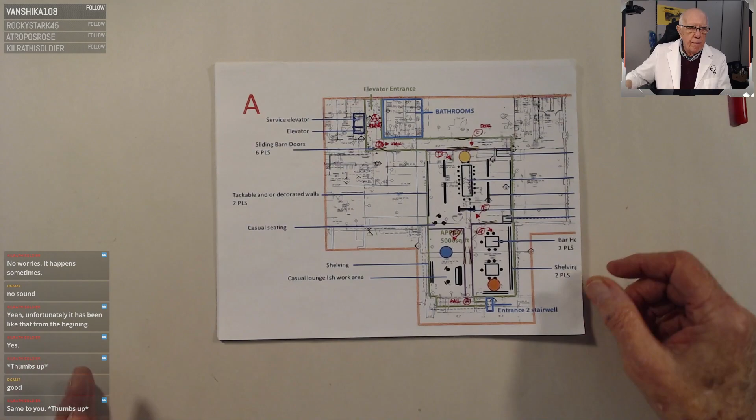Let's go through this, and I think a very interesting thing took place prior to the holidays. I was notified by an organization that they wanted some assistance doing an innovation center, and they had some conceptual work to take care of, so I obviously consented and said, yeah, we'd love to help you. They sent this along to begin with, so I'll walk you through the process step by step, how we took this thing from beginning to end, and what the results are thus far.

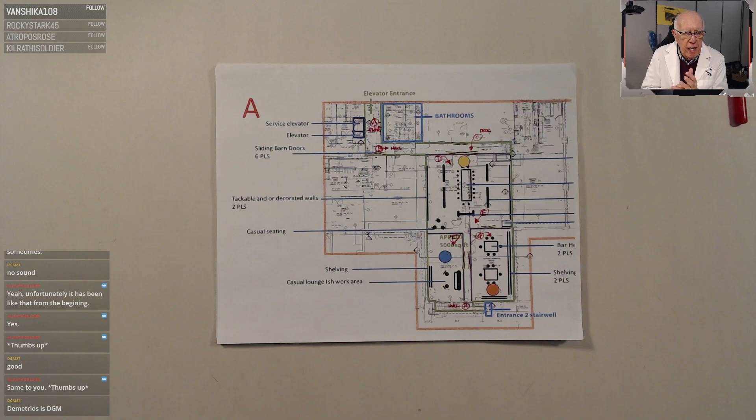So they sent this footprint along, and they've resolved - this building is interesting. It's up in this very local area here, but it's a very large space, and everything you see, for example in green, this area here and all this area here, was all part of the process that they wanted to retool. When I took a tour up there, it was really amazing because the thing is massive. You've got about 20-foot ceilings, very dark and very little light.

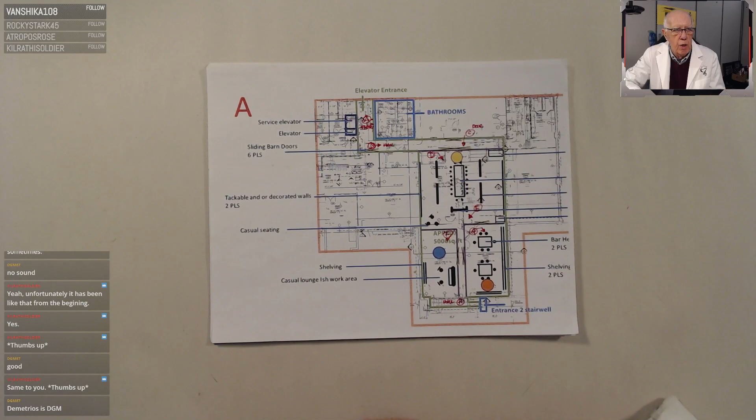Not very conducive to being an innovation center. The reason for this purpose, changing this basement area into an innovation center, was that they do a lot of development work and conceptual 3D modeling and thinking processing. So they needed a space to go down and experiment with some of the product work that we're going to be dealing with for the international market. Very large corporation, does about $120 billion a year in profits worldwide. So a very unique organization indeed.

So all that to say that I sat down with them and went through the process, toured the facility and the room that we're going to work with, and man, it was massive indeed, huge.

So you come off the elevators, and there's a facing wall here that needs to be dealt with as a graphic piece down this hallway. They want to insert some barn-type or country-type doors and some graphics on the wall, then back to double doors, barn type doors here, into this first area called their innovation center.

That's where they have a large table, some tables, some movable boards, and storage areas. That was one space. Then you move down the hallway here.

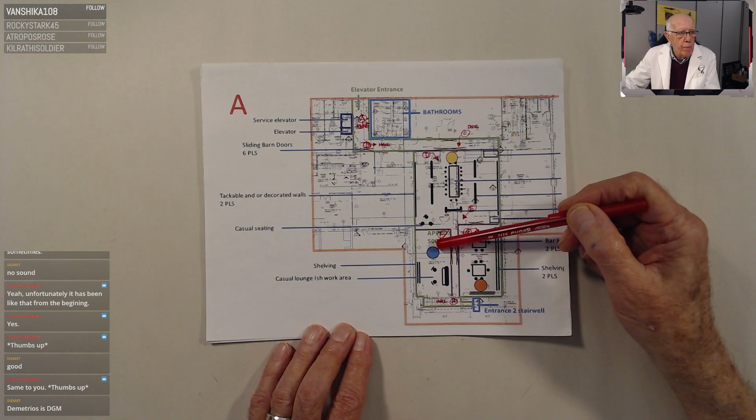On this side was a consumer or client lounge where they've had guests from around the globe, who could sit there and regroup and have meetings. Across the hall from that was another space called the preparatory or prototype lab, where they'd actually build those pieces and test them.

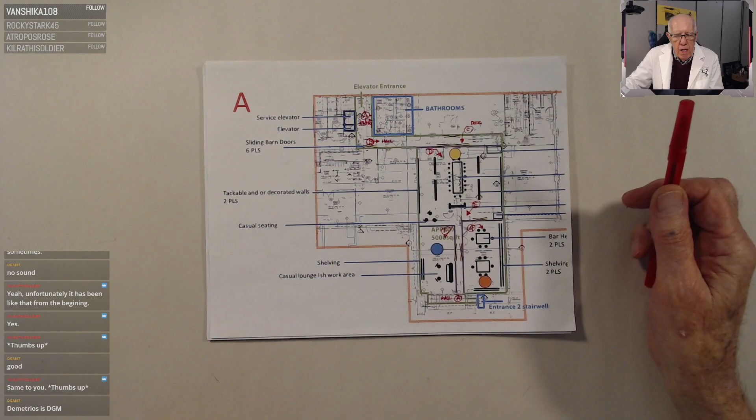So that's basically the overview of what this whole process was all about. The interesting thing, my comment was, there was a bit of an offset from the front portion of the innovation center, from the lounge and the prototype center.

I thought it'd be interesting to bring all that forward and put some nice beveled doors or entryway pieces in there, so you can see what that space is going to look like when you come into the innovation area.

This is all glass, some glass area here. These purple areas would be all glass as well.

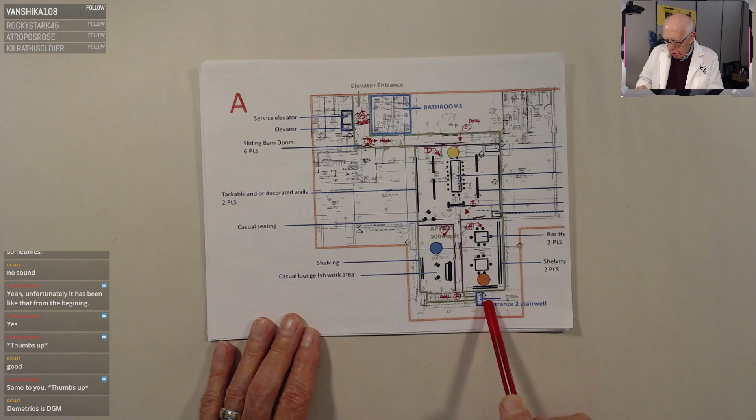Last but not least, the main entrance to the facility would be down here in the back of the building, with a big hallway and some stairwell pieces they want addressed as well. So let me walk you through how we started here and what unfolded step by step.

I'll keep that handy so we can go back and refer to it.

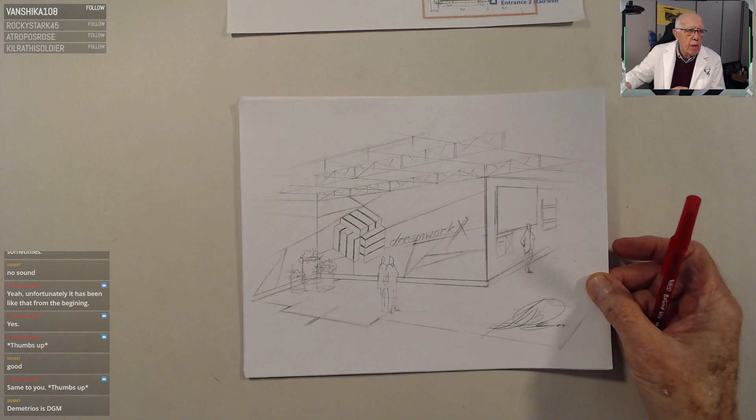The first sketch I did—before that I always like to do some little thumbnail studies, about 3x5 card size, to get the perspective and view right, keeping it very simple, knowing from the very beginning that this client's system, working with them, wasn't quite certain with the loose, very gestural sketches I like to use for conceptual development work.

So I had to be very careful about how to develop these first pass sketches, so they could see very clearly what the idea was about and what we were trying to convey to them.

So I went from very loose little sketches, for my own purposes, looking at how to break the shape down, then took those sketches and developed a second pass of thumbnail studies so they could review it. So this is what you'll see here.

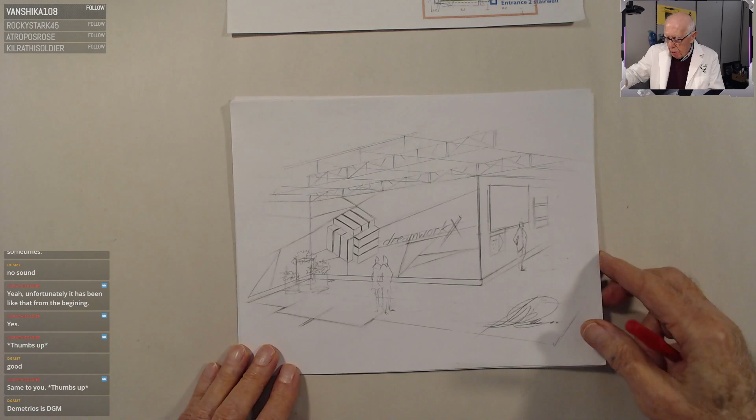This is sketch one, coming off the elevator, which is here, and looking at the facing wall and the structural elements above, up in the ceiling area. That's what this first one is all about—that was the entry piece coming in.

The second one going down the hallway, when you turn around the corner—let's go back to this one. When you turn the corner here, the big long hallway comes through, and we put this in here, and they go back and forth.

Down the hallway, they wanted to add these very exotic barrel lighting pieces—again, the barn door theme—and they specialize in certain metal materials, like storage drums for products worldwide, both cardboard and metal, just a variety of things. They've got about 400 items on their product development list, for what they're doing and involved in.

Very high ceilings, about 8, 16, maybe 20-foot ceilings—just an amazingly huge area. Again: barn door, a little wall space, glass area, barn door, glass area, and again a hallway down the way. Just to give some perspective to the shape itself. That's the view—that was the selected one, like that again.

Now into the innovation area—let's go back to this. This is the innovation center here, with two very large tables. Everybody comes around to construct the piece and do some building work.

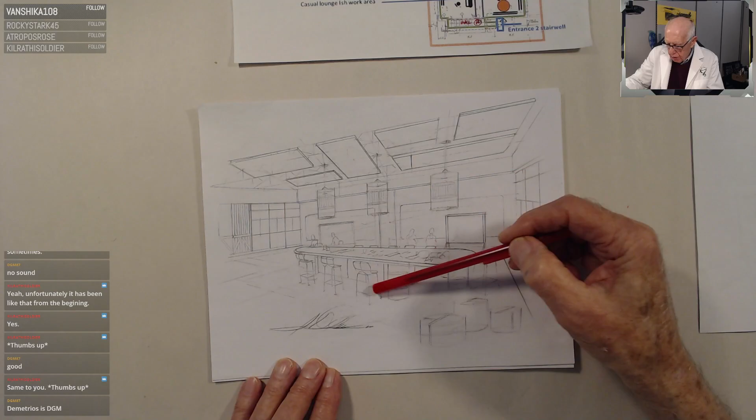Some pin boards back here, and some movable boards here, and stools, and chairs and the like, and just odds and ends in the building. This would be the glass area and a little portion of the doorway here, so they could see what was going on in the space itself.

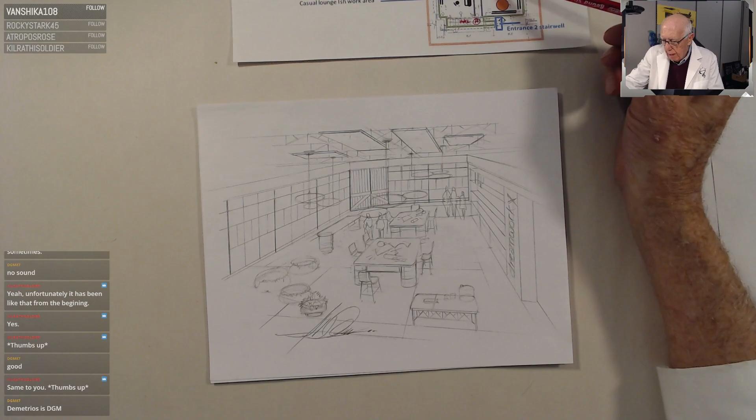So it was a third study we did for the Innovation Center, and they approved the view, looked pretty good. So we went into the next step, which is getting into what I refer to as a prototype lab, right in through here. This is the prototype area, where they'd come from the innovation spot, develop something, bring it into this area, and begin to develop a tighter process for the system they're dealing with. Again, same thing, a lot of glass, the barn door, and back to glass again.

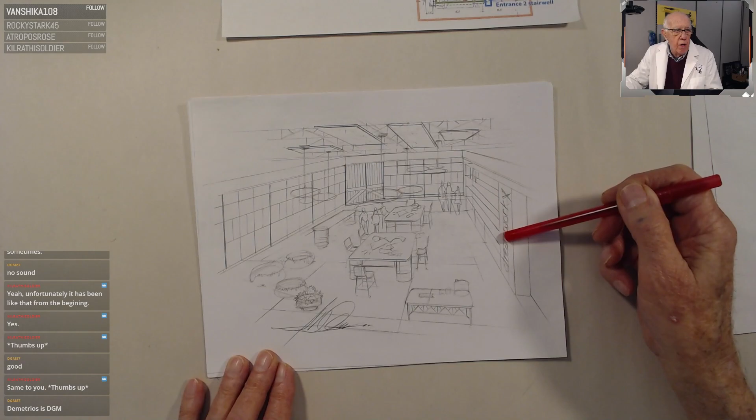A lot of storage shelving on the other side, on the opposite wall. Coffee center, some features table, some elements of just comfort in there. And then the two tables to work with to kind of resolve what this product was going to look like as we went down the line here.

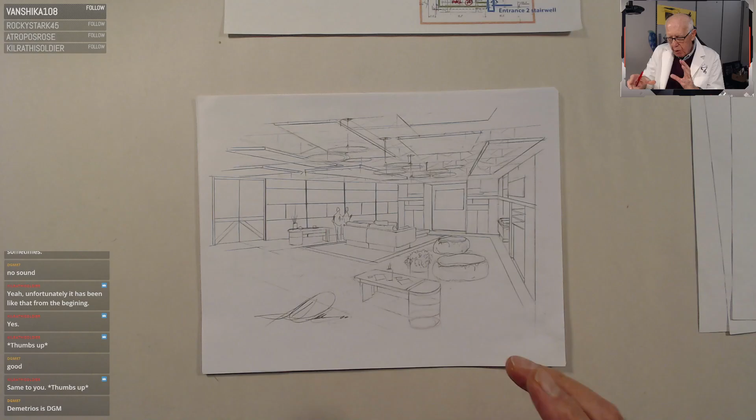So that was approved. The next one was coming back into this lounge area. Same system, for example. This is where we are here with that lounge area, and sure enough, again, barn door, glass into a back wall, television center, coffee center, storage area here, sofa, tables, and some accoutrements in the space to comfort the way through the whole process. So that is another view that I thought was pretty well merited for the actual sketch itself. So we put that together, and that was for the lounge.

Then the unique one was, let's go back to this one. They had these offsets here, if you notice, this was offset here, and this was offset here. So my suggestion was to move this wall in a bit, come back and severely bevel that back so you can see there's an actual break in that wall itself, so you can come down the hallway and see what that looks like. So those two bevels, those two 45s, would actually be barn doors for entry and egress areas here.

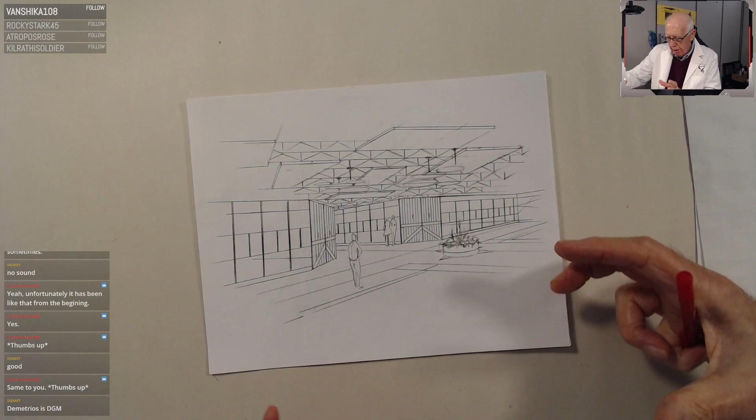So here we are. That was the actual footprint, and this is what the view looks like. You're coming down the hallway here. The Innovation Center's back here. Down the hallway, a lot of glass, barn door, glass to barn door. And again, notice that 45-degree angle so you can see what that element's going to look like when you come into the hallway. They bought that view. That was a good aspect to change, that bevel change in there. They thought that was a good move.

And the last sketch we did was the entryway off the back of the building, which again, just qualified. Stair steps, a single barn door, a graphic on the wall, and then just some elements around that. So those are the first loose studies.

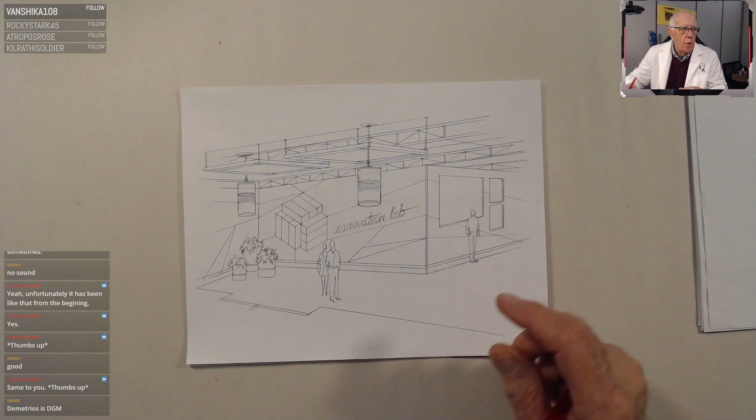From the loose studies, I tightened them down a little bit, went to this family of sketches. Once I got those all set up, I went right back in and retuned them and tightened them down. Went back to sketch 1. There was the first sketch again. There's the elevator piece coming off the elevator, looking at those pieces there. So that was part of the whole process, looking pretty good.

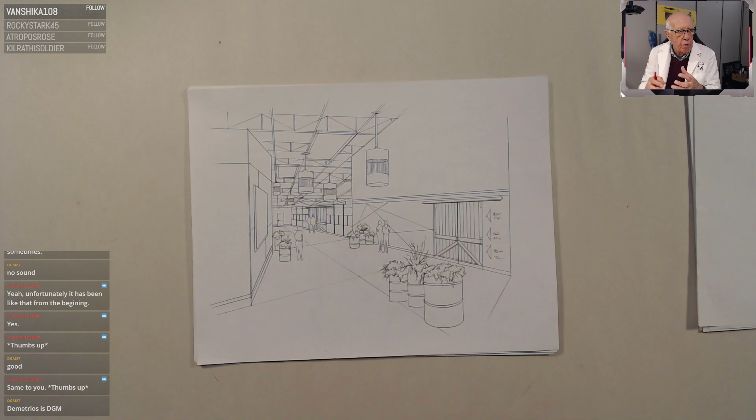Tightened that down a little bit, and let's go back through again, right down the line. Second, tightened down a little bit more, where you can actually see some of the graphics on the wall, some of the detailing work, for example, on the doors and the glass, getting a little more specific and tightening down to a more dramatic view. And again, these very high lofted ceilings. So that was that, and got it going along here again.

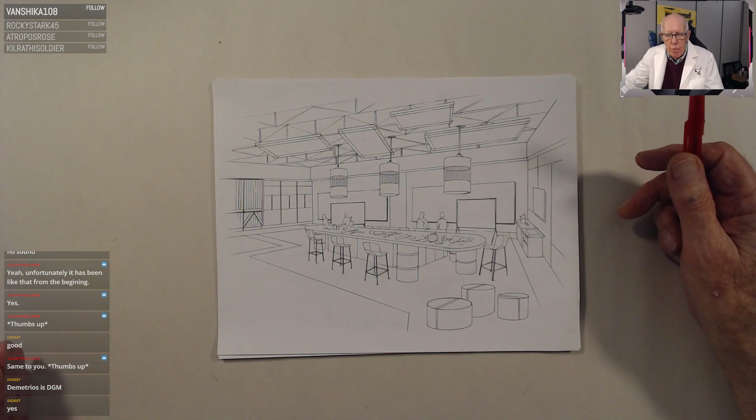I hope this is helping to clarify what the mission was. I'm not trying to race through it. I want to make sure each step was extremely sensitive, because when working with a new client, it makes a big difference to listen carefully to what they're after. In this case, I went through a series of small thumbnail sketches first to get acclimated, then went to a tighter version, which is the last set I showed you. This is a bit tighter variation to let them see what the view is going to look like before we went to final color.

This is the innovation prototype, part of the innovation center, where they actually work with a large table, working through it all. And Kilrath, so far so good, is helping with the case here. Are you still with us? Thank you very much if you are.

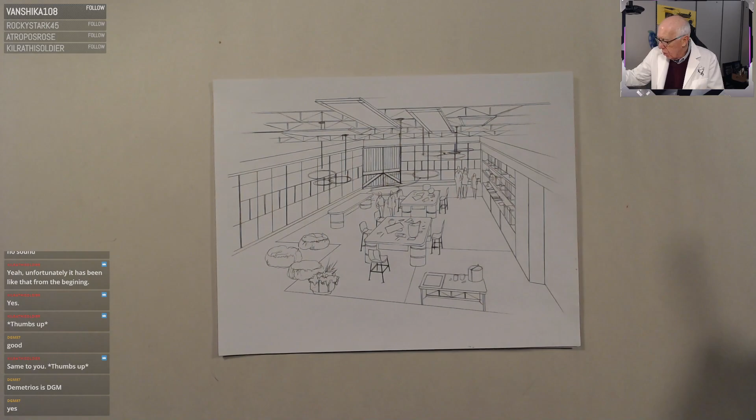Let me know how it's going here. This again is the actual prototype center where they come in and build this thing where these elements are looking at, and that's what the final process will look like. A very interesting thing to notice in some areas, in this innovation area, is they had these very strong barrel lights over the top of the table itself, an interesting feature. It played off what they do from a manufacturing point of view too, so it really helped that case quite a bit.

So those were barrel lighting over the top, and in some other areas in the space were sprinkled through it all. But when they went to other areas, for example in the prototype room, there's halo lighting coming off the ceiling area. These areas here that are more elliptical were actually the halo lighting, which is really a neat deal.

Is this the first page CAD drawing that you started with? Yeah, that first page is a CAD. Yes, this one right here, for example. Let me see what I do with this thing. Somewhere in here, I'll dig that back out, Demetrios, and let you see what that looks like. Somewhere along the way here. As I dig it out, there we are. Yes, in sequence, that's exactly what we are dealing with. That was what I was handed to work with.

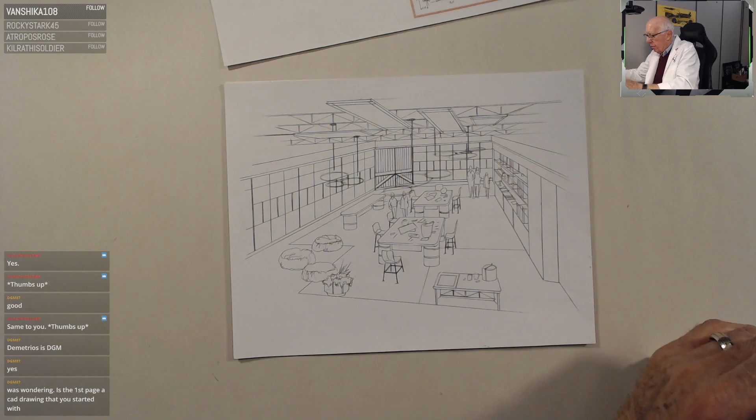They had a building footprint layout, but they didn't have the conceptual work put together, so this is what it addressed. They prepared a concept in a CAD setup, knowing where all the things are going to go. Then my job was to come in and deliver some of the sketches that we wanted to look at. No problem, you're welcome. Thank you, so let's keep this out for a moment.

Again, back to the Innovation Center, probably the prototype room. Again, a very, very large area, but this is more of a refined area where they could take ideas from the innovation area and move it right into the actual building of the prototype, finalize the design, and move on to hopefully manufacturing. So that took care of that piece.

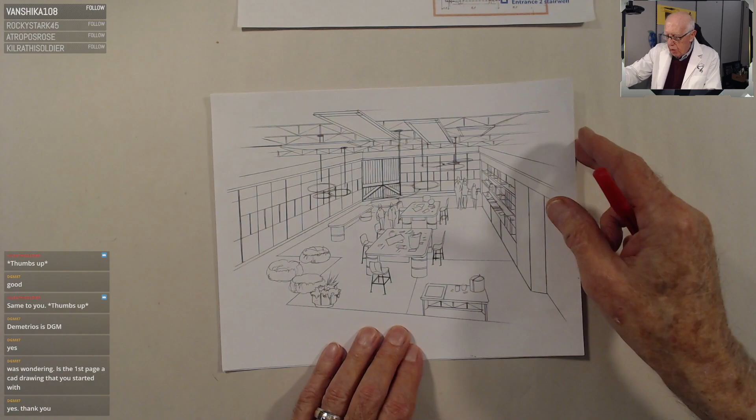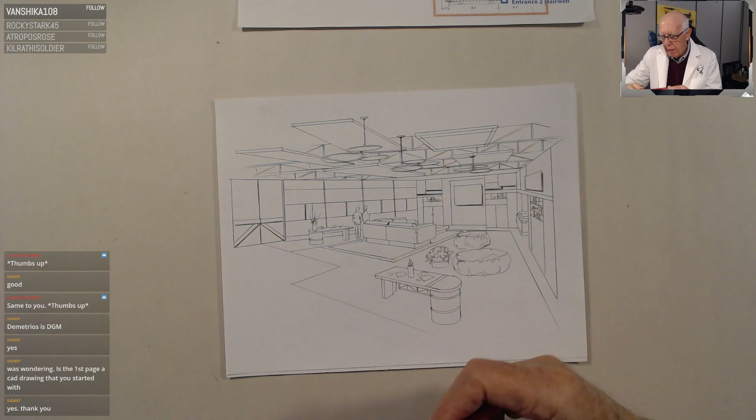Then the next one, a little slower process coming in here. This is the actual lounge itself, again a tighter drawing. Notice again, still with that halo lighting. Along the way, two interesting things took place. The structure in the upper ceiling was so ominous and dark, they wanted to change pace a little bit here. So they asked me to inject some wood panels along the ceiling to break up that dark mass area, and that's what these represent.

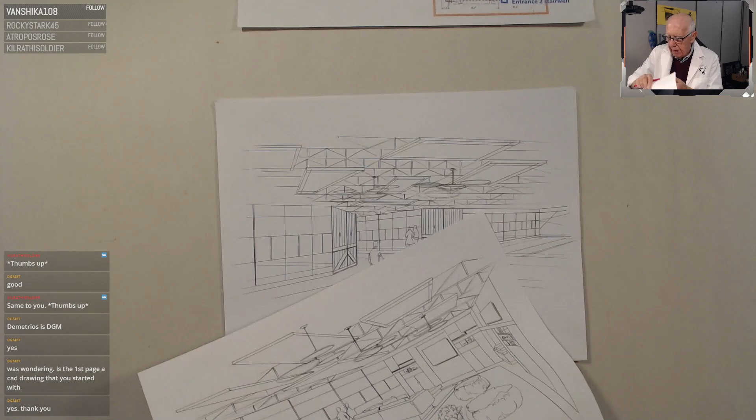These floating panels were actually suspended in the area, and you'll see in the final color studies a comment I think was really critical, which I wish I'd thought about ahead of time, but I was under duress to get these things back in their hands for approval. So again, this is a lounge area with all the elements in it to deal with. The last couple here show a refined view of that beveled area in the back, two areas: the lounge on one side and the prototype on the other, with those 45 bevel barn doors.

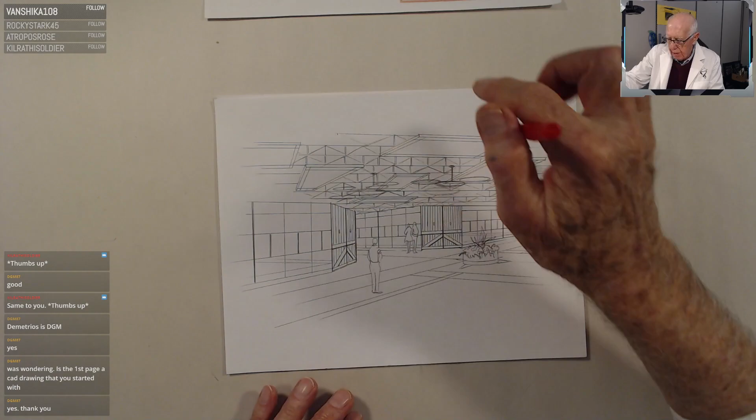And that's what this guy represented right here. So we had glass to bevel barn door, glass to barn door, back to glass. Then the ceiling graphics, again, notice with the same panels to kind of break up that dark space, were injected into the sketch itself.

So once that was taken care of, that was them. The last one was just a more simplified shot at it. We took a lot of the fluff out and kept it very straightforward. It's a very simple entry here, entering back from behind, coming into this entryway down the hallway. The graphics again, the corporate graphics, the simple barrel lighting, and just graphically breaking up the space to give it some sort of a presence.

So those sketches really kind of wrapped up. Let me move these out of the way here. Wrapped up the first pass of getting this thing up to speed and getting some approval from the gang to proceed with some final color.

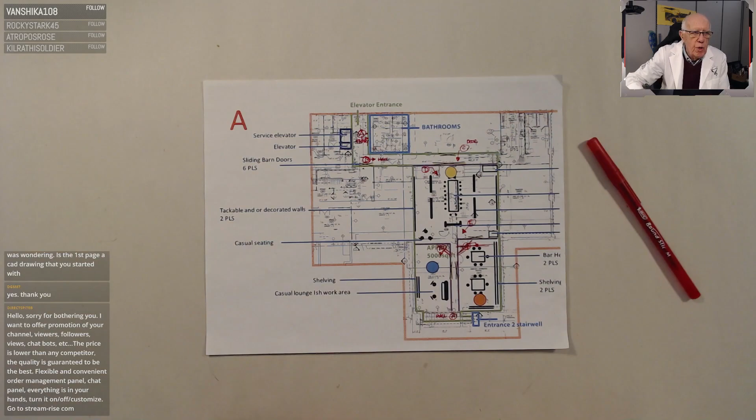And when that took place, it was interesting how it all put together. First time chat: hello, sorry for the bothering you, I want to offer promotion. No, thanks, don't want to have that. So let's get that out of the way. No, thank you.

That kind of really settled the score in terms of what the whole content was, and it was really interesting to see it all. We had great communication. The person I was working through, 2 or 3 individuals, did an outstanding job of keeping on top of things. When I delivered a sketch, we'd talk about certain aspects of it, pros and cons, and they were very helpful in clarifying what their needs were. It made it a whole lot easier when you have good communication like that, much easier to move with and get good streamlined input from them. So that was it for that.

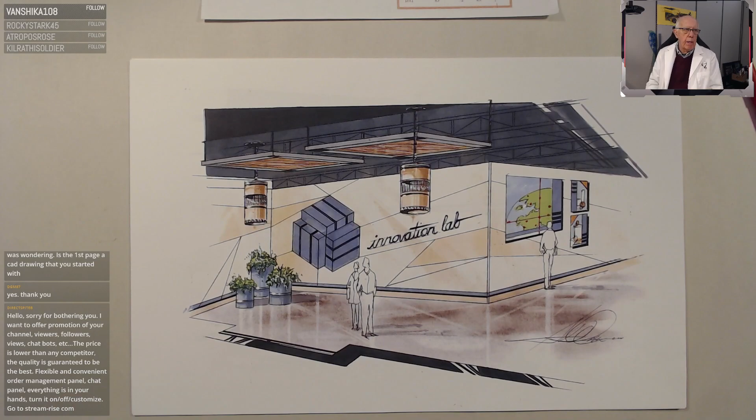Let's move now from that family of sketches, the pencil series, to these. These are the actual final 11 by 17s. I redrew every one of the 7 concepts we dealt with here. Let's put this up to speed. There we are. Is that making sense, gang?

Here's the final color series we did for this family of shapes and concept sketches for the Innovation Center. This one again is very simple. We needed something in the walls to break up that mass, since there was a lot of blank space area, so we went back in and added the logo. Those are the barrel lighters I was telling you about. These are the wood panels that help break up the very dark ceilings and bring it back into some sort of warmth and reality. We related that throughout the entire building, all 7 of the actual concepts or studies.

So again, entry area, elevators are back here. You come off the elevator, turn down the hallway, and then right back into the basic hallway that leads you to the Innovation Center in the actual root of the room. So there's sketch number 1. I'm going to get these out of the way here, we'll just stack them up.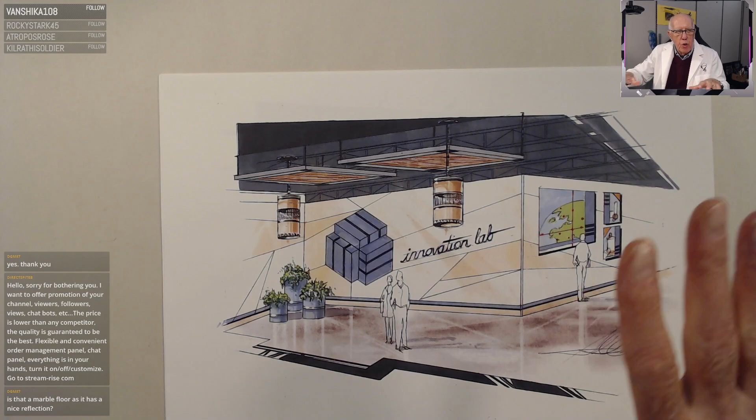Here's the final study coming down the hallway, where you move into this area. Is that a marble floor? It's a nice reflection. Let me go back to these. Every floor, for example, the choice I made for the floors was a very poured, simple, stained concrete. So this is not marble, it's like a dark brown, terracotta, black-gray mix that we put down on the floor itself, Demetrius. It wasn't really marble, more of a texture change, like a painted system. Then they sealed it with a high gloss finish to give the reflection of what it might look like. So that's what that is. Thank you, very good.

This is the first sketch off the elevator. There's sketch number 2, looking down the hallway. Same floor pattern. Again, the doors, a little bit of detail work, and that extremely high, very dark ceiling overhead.

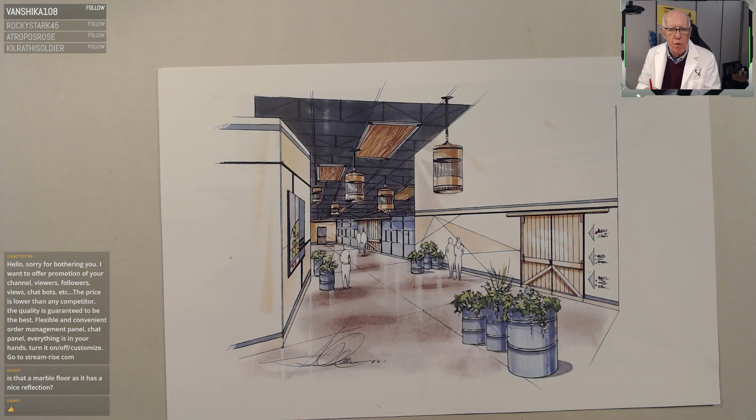And then these floating black panels, these wood panels in the actual ceiling. I made a comment a few moments ago too—if I had to do this set of sketches over again, they approved this pattern of wood, but I'd like to have seen them go much more orderly down the line, maybe every other row, then that structural piece over the top overhead. It worked out all right for them, but it had a little bit of a disjointing about it that I didn't really care for. But hey, they're the individuals that know this space much better than I do.

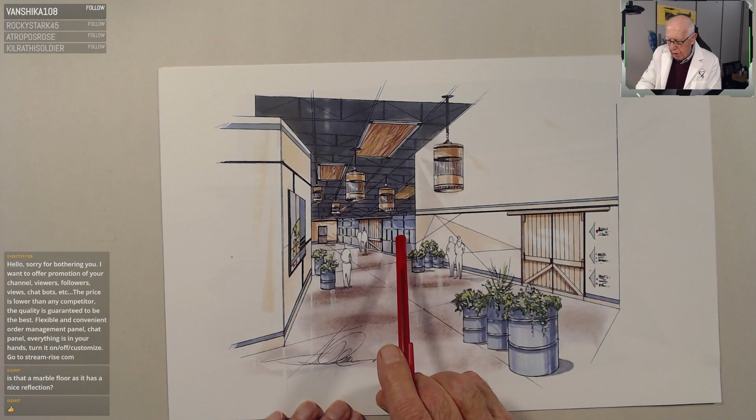So that's how that came together. This is down the hallway. This is the storage, and this is an IT room back here, but they wanted the same barn door process to be injected into or utilized. Down here is where that double door is, this is where the glass area is. Behind that is where the innovation room is first, and behind that the prototype center and the lounge, and then in the back door area here. So that's sketch number 2.

That's the main hallway, let's get these out of the way. This is sketch number 3, the actual innovation area here. We have this very large working table, a lot of elements on top of it, and notice the barrels are kind of supporting the table, chairs, some little storage areas or soft seating areas here. Glass barn door again, and then a lot of information back here as far as the information goes. These are the floating boards or the movable boards were up front.

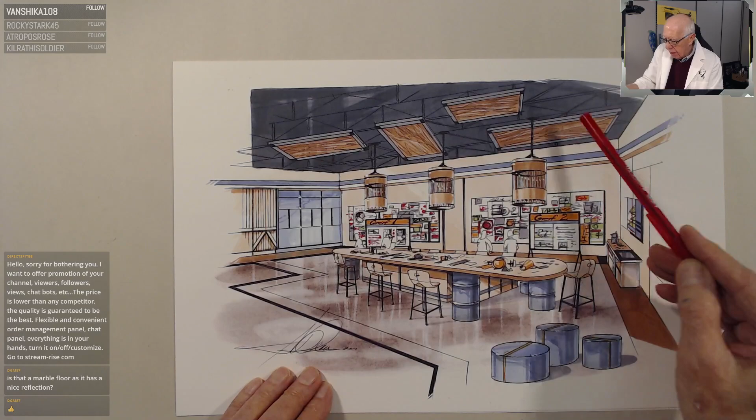I think you can see in this sketch more than any others that I really would have preferred to have kept this much more orderly. Maybe just a row over the top of the table itself, and maybe a change of pace on the flanks, parallel, 90 degrees and 90 degrees. It just looked too random for the actual process of the space itself. But they liked it, so can't complain.

It was a very good program, happened very quickly. And by the way, all these sketches, for what it's worth, were all completed within 3 days—from concept sketches, loose pencil sketches, refinement sketches, into color sketches. I'll wait for a few moments to add one more thing here at the end, which was a real surprise to me, but let me know that they were happy with the job being done.

So here again, this is the innovation area. So we'll come back here with this beauty—that's Innovation Lab. And then this is the actual prototype area here.

Same process again. Notice this is what really caught me again—I keep looking at this and it's disturbing a little bit. I'd love to have seen these been much more... I ran out of space in the ceiling. Would have loved them more orderly, to get them down the middle of the road, or else maybe run them parallel back over here. But the space, the view changed that quite a bit, so I had to really adjust my thinking here.

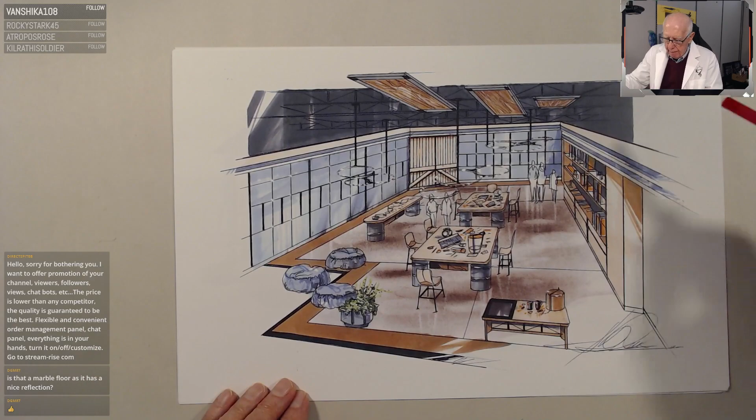But again, auxiliary table, seating area, glass to board, back to glass. A lot of storage shelving in here for materials and supplies, and maybe research and resource work. Little copy station here, table again with the barrel supports, and just a really good functioning area here to deal with in terms of the final prototypes.

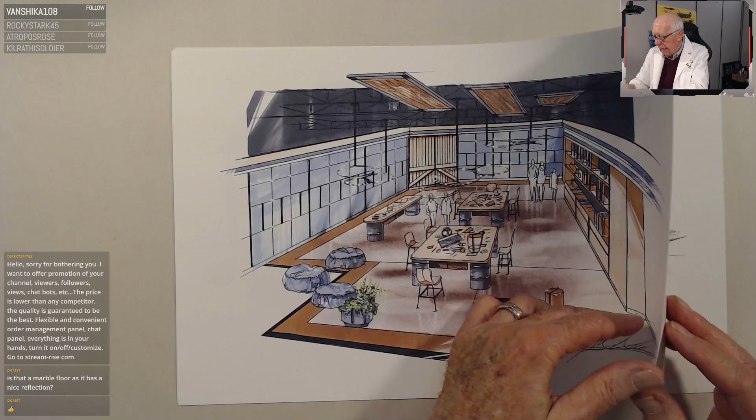So then we have that, and then we move on to the next one, which is the actual client lounge. They would bring individuals in from around the globe, and they wanted a space where they can actually come in and just put together some relaxation, and make a place where they could maybe think through contract work or negotiations, whatever they dealt with.

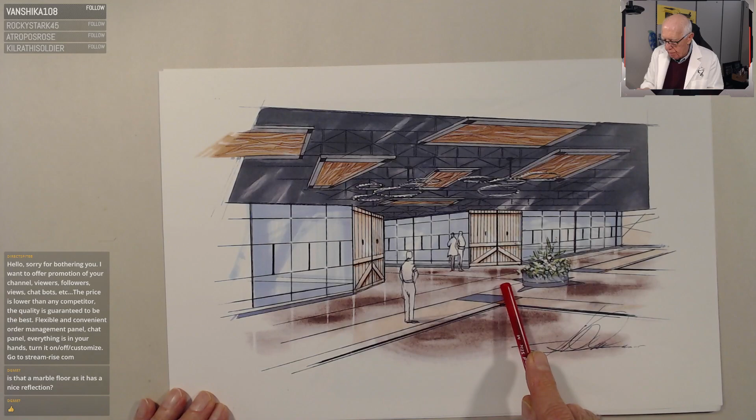The Innovation Center is back and through. Behind this wall here is the Innovation Center, and also on the other side as well. So it's a very large area here. But you come down this main hallway, and as you're walking down it, you'll see the beveled entry doors and the glass areas on both sides.

This side would be the prototype room, and this side was the actual lounge area itself. So again, I think you'll notice the change of pace. It had the halo lighting in there, which is kind of nice to have as a feature.

But had I to do those all over again, I'd have run those panels right down the center, or else run them the other way—one, two, three, four, five—and go the other direction to keep it a little more organized. The reason being all the sketches were much more formal and organized, and I thought that by breaking it up, even though they wanted it that way, it just didn't seem to settle it properly from my point of view.

But nonetheless, I'm not complaining. They did an excellent job of putting it all together here. That was the actual additional sketch.

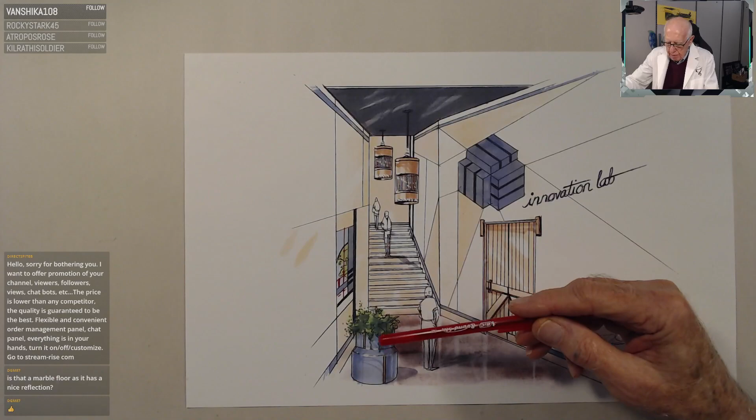And then the last one we're looking at in full color was this guy here, which is the back door entry area—again, much more simplified. The stairway goes up to the first floor of the building. The logo is a very simple thing on the walls, notifying who you are, entry again, and then just some detailed work in the back area to get those pieces put together.

So let me put these back together again here, and just bring up the speed about these sketches. As I said, from beginning to end, the whole program lasted about 3 days. They wanted it back in a hurry, obviously. What else is new, right? We all experience that from time to time.

What I thought was really a great program in terms of getting to know what this organization does, how they handle certain things, and what the process was from beginning to end, and what they want to develop. And so now chapter 2—this is an interesting facet that I think we'll spend a little bit of time on with you, if you don't mind.

It was interesting. Once I submitted the sketches and emailed them, had them put on a zip drive and shipped down so they could put them into a presentation coming up sometime this week with their management, they came back after I'd shipped the sketches in full color and said, hey, we've got a great concept here, you've done an excellent job. I thank them very much for that, obviously.

But they said, we'd love to have you take a look at—one of our directors brought up the fact that if we're going to do this, maybe we should do a freestanding, old-fashioned barn or modern barn type building that we could put this piece in. And I thought, wow, how cool would that be? So, to make a long story short, they said, would you be willing to provide for us some real rapid, quick pencil sketches on what that barn or that process might look like? I said, I'd be happy to.

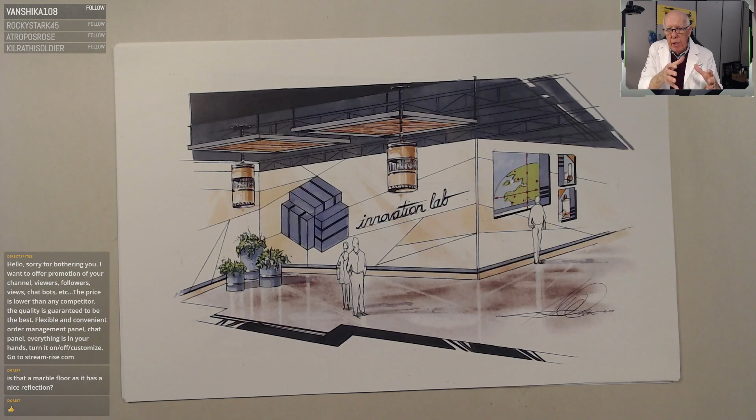It's a very simple process of stating, listen, you've given me all these options, and here's your concept, but I've taken your ideas and moved a little bit further with each one of these, and what do you think? That makes an enormous amount of difference in terms of putting it all together.

So don't misunderstand the context here. I was just grateful for the fact that when this is all said and done, they came back and said, hey, one of the directors brought up this whole concept about the space and the properties we have owned. By the way, this manufacturing facility, this building, this company has about 1,000 acres to work with. They've got 4 buildings on the site, which is the main office, a manufacturing facility, a prototype facility, and now hopefully this innovation lab to work with. But they also have the space to maybe build a freestander.

So all that to say, once these sketches were completed, they came back and asked me to do some quick thumbnail sketches on what that potential barn, modern barn, would look like. So here we go, I'm going to pass these up there. Can you see this okay? Is that clear? Is that making sense here, gang?

It was a very simple footprint, which they gave me again. They showed me where they wanted this thing to go, and the actual footprint, for what it's worth, let me see if I can grab a sheet of paper. I'll just grab, pardon me, something here. Grab some paper.

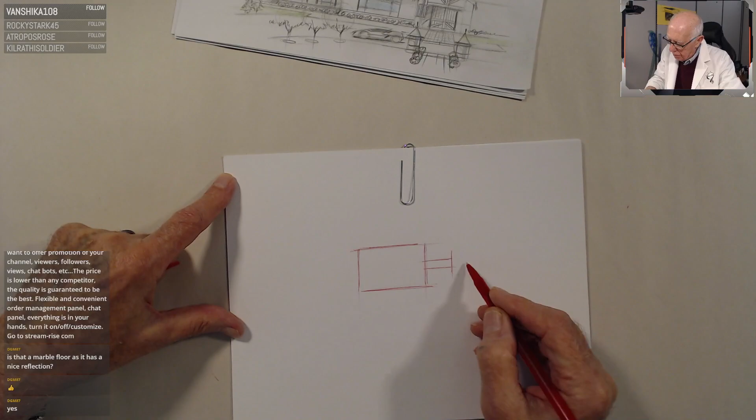Now, the footprint that was handed to me was very simple. For example, they gave me a rough sketch that looked basically like this. They had a primary barn area - this would be module number 1. Then they had a breezeway walking off of that, and a small building that's kind of adjacent off to one side. So that was basically it - this would be the primary building, and the auxiliary building here.

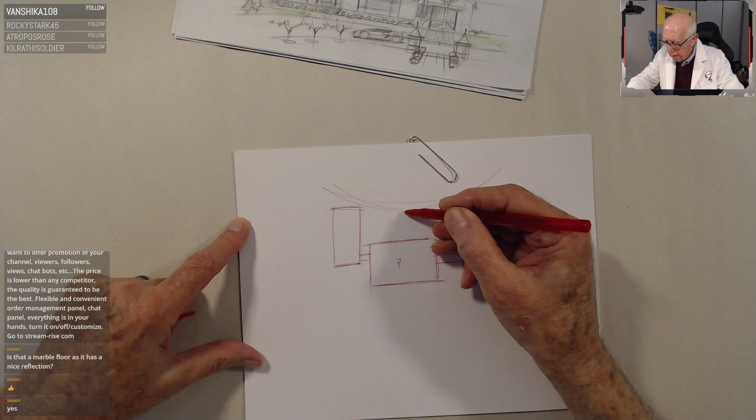And then off of that, they had another area where they wanted to use as maybe a convention center, or some sort of walkway through it again. And all of that, for example, with a nice big radius walkway coming through it and into the primary area here, in the actual building itself.

So when you look at that process, what I would do here is just kind of come back in and say, here's my horizon line, and give you a quick thumbnail sketch here. Horizon line, and put it in context - you've got A coming in doing this. You have B off of that, which comes in the other direction, so it's going to come back and go the other way, which is going to come back and crescendo like so.

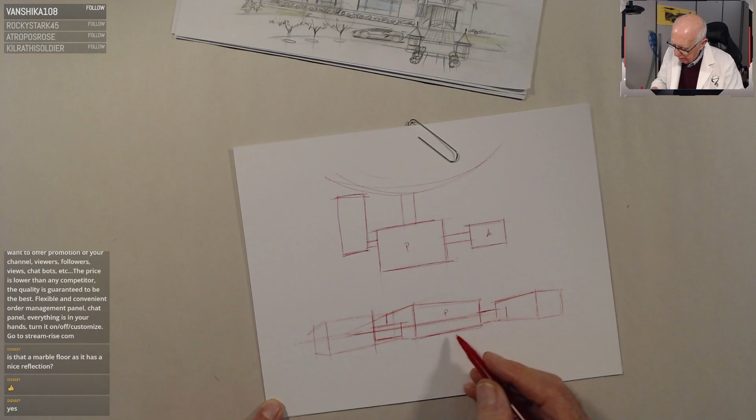So that's A, and notice again this building A - this would be the P. Now you're coming back up here with this little breezeway, which gives you this. Now this one comes back and goes at 90 degrees to this one, so it's again the same basic format, but a little smaller, and then it kind of collapses back onto this horizon line. And now you have this - so you've got that breezeway to work with. There's A and B, and you've got this connector coming off of this into that. Now the trick is to take this shape with that footprint, so there's A prime, the auxiliary.

So that's what the basic format looks like here in rough sketch. And when you come back in, now you start to assign barn type character. Off the center line, break it to the upper, take that back in perspective, take that back, run that through, add that to it, come back in again, find your perspective center, barn type, break that up, bring that through, and before you know it, you've got a whole series of pretty neat looking things here.

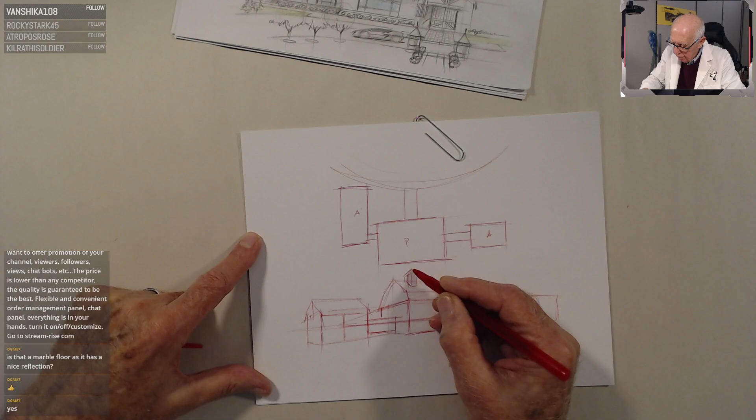That does that, that comes back, gives a little bit of this. If you have some cupolas on this thing, put those cupolas in place, put a little bit of pitch on top of those guys. Again, notice how quick that's coming together? And I think what I'm getting at here, folks, I hope this is not something where we're wasting a lot of time. Let's go back and get this center line in here.

Mansard, break, break, okay, slope, and back into perspective. Center line to center line.

Notice out here, you've got this very large radius coming into it. That's a roadway, there's your center line here, getting that guy up to speed. There's your entrance area. This comes out, and if they want to add something to that, now you come out in the other direction with an element that does this, maybe with a simple peak to it.

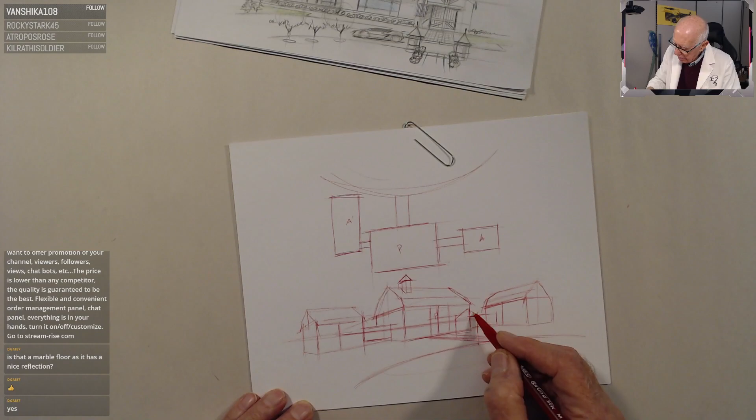And then all of a sudden you've got these little weather vane things, you've got another cupola coming off of this thing. Look at that—all of a sudden you've got a really neat little composition piece here based on primary, auxiliary, and auxiliary. So there we are.

It's very loose itself. Then you put this in scale, and you start to put in some of the things you're dealing with as far as colors and so forth, or tree lines. Put a little bit of texture in these guys, real loose.

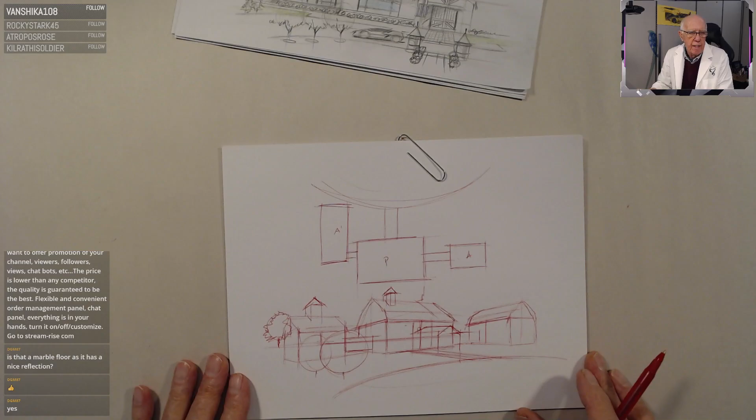This is what I started, what I was referring to earlier in the commentary about when I started this process. I went through a whole series of little small sketches like this to get a feel for what I was looking at. Not so much in this barn series, but in these interior space pieces, which are extremely difficult to work with. Sometimes interior spaces can drive you nuts.

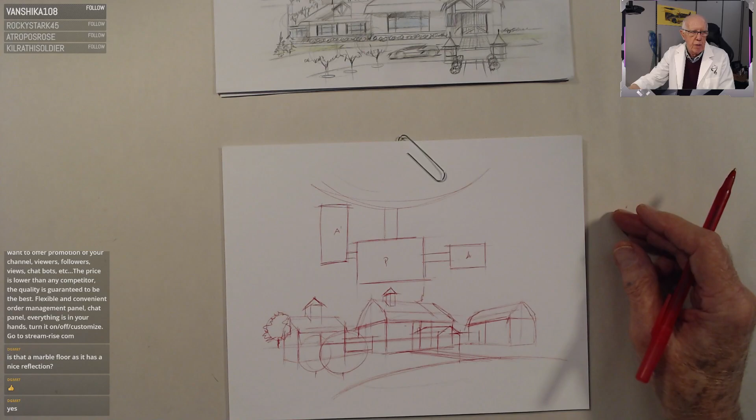Let me use another sheet of paper here for what it's worth. One of the things about interior space, once that horizon line is set in, notice—let's use that hallway, for example, vanishing point. Come out of that thing. Change the tempo, change the view. Come out of here, bring that down. Bring the walls into play. Bring that over, bring that over.

And the vanishing point—notice, really moving it around quite a bit here, into this area, extending that out, back location. Finding the heights, breaking that back, coming in the barn door, in the glass, in the barn door.

Notice, I see you're looking at that scale, kind of putting it all together here. Very loose little sketch here. And you can take that whole process and open it up. Once you've got that, you can take that barn wall, open it up, tighten that one down. Open that up just a bit. Bring that through, run that across.

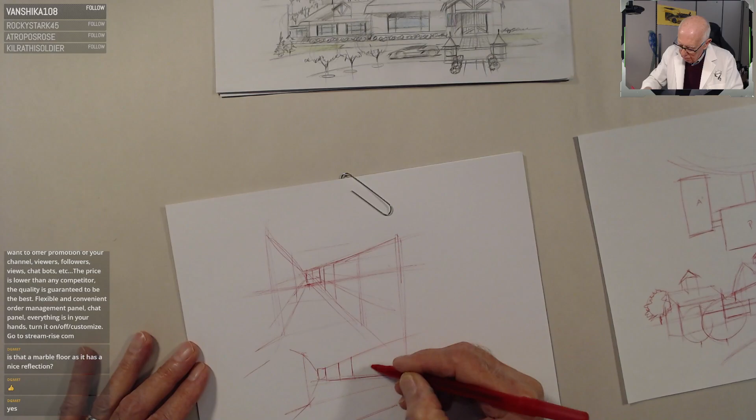That's where the break is going to be. So I kind of bring that into the hallway, then again, glass, door, wall, etc. Very interesting—just breaking things down like that makes it so much less difficult to deal with because it takes the pressure off of us.

I hope that little explanation helped a little bit here. I just want to let you see, oftentimes I'll go through the process without describing it much, but I'll be doing more of that in the next few weeks, back in the drawing cycle itself, rather than some of the finished stuff we'll be dealing with here. So let me just get this out of the way. Thank you for that indulgence. Did that make sense, sir, gang? Demetrius, that helped at all to kind of show you what I went through in terms of process to get the sketches laid out. And if you're still there with me...

That is super, very good. Anyhow, looking good, gang. Let's go back here.

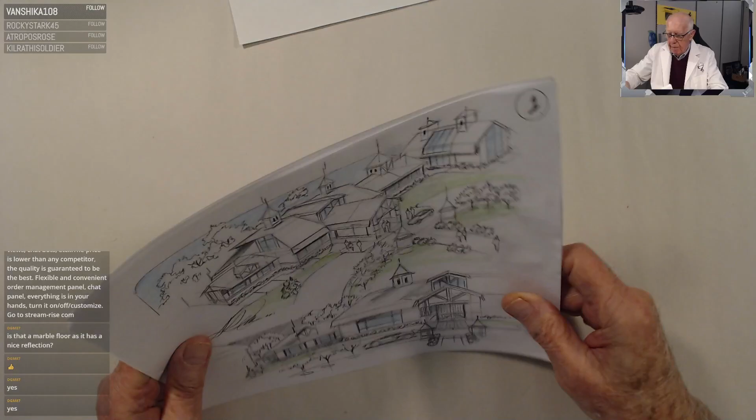Let's go back, now let's show you the final. Once they said, hey, we need some concept sketches on this barn study here—these are really fast, again, layout sketches. Notice a lot of construction lines going through to find out where I am here. But the primary overview, here's the auxiliary building, primary building, and an addition and another. They wanted me to look at it, but at the same time add some things that I felt might have been an asset to them.

Here's an elevation study of that same barn process. So that was number one that we were dealing with here—that was the first sketch I did. Let me get these out of the way. These are all sent to them very quickly, and it's all going to be part of the presentation as well, from what I understand, when they make the presentation of the interior space. That was sketch one. Sketch two, a variation on theme.

For example, with this barn door or barn study, there's the primary building, the auxiliary building, and then an elevation looking at it from the front, showing what that might look like. That's sketch number two.

There's a third study, a little less compound, much more of a cupola or dormer up on top of the actual barn itself, which is kind of interesting to deal with. I'll come back to that.

Sketch number four, this one I thought was much closer to what they're actually after. From my perspective, what they described was very much in this realm: primary building, auxiliary one, and auxiliary two, the little breezeway and connector to that side. This had a presence and felt comfortable to me, and I'll tell you what took place after this was submitted.

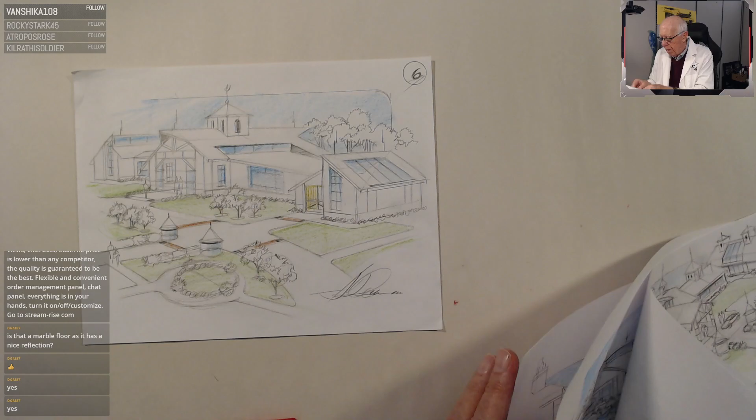To make a long story short, when I submitted the sketches, they came right back saying they loved concept number four and concept number six. Those two were the winners, and they're good choices—the ones I felt much more comfortable with.

All these sketches will be part of the presentation they make to their management to build this place. I'm hoping, and I was told, once they go through that first pass there'll be changes made and some configurations will come into play. That's fine, that's all part of the process, as you well know from the design world. Not a problem at all to work with that in any way, shape, or form.

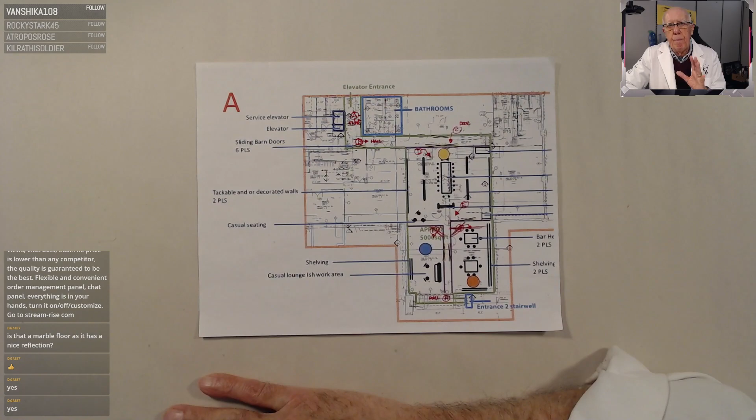What I'm excited about is that it's all set now, and I'm sure we'll get at least a second or third pass to refine this further. Hopefully, if they change their mind and go from an in-house basement study to a freestanding barn, that would give me the opportunity—I'm not being selfish here—to work with them from an architectural point of view, develop the concept sketches for the barn, and work with an architect on the interior space as well. It could be a lot of fun, gang.

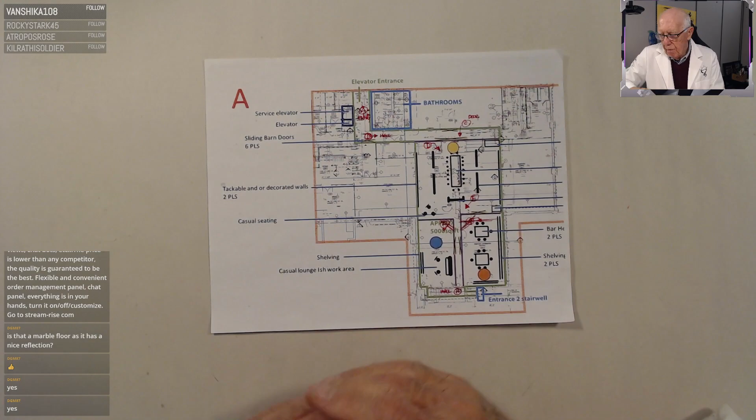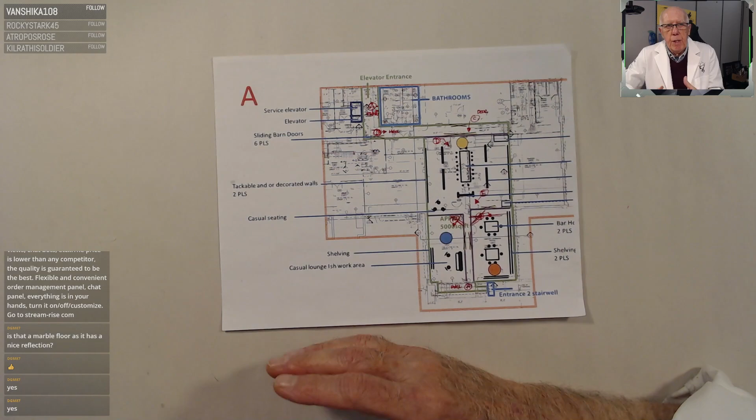We sat down with one another and he said, hey, you need to bring that tempo up on your website. The one you have, the old one, is just way too cosmetic. It doesn't tell anybody what you do. And he was right on, spot on. I'm not being critical of the person who put it together, I'm just saying it was a very quick cosmetic piece to look at.

But Michael came in, I worked with him for about a week or two getting some information put together, and what he did to that website is absolutely marvelous. So please take a minute and take a look at that.

We're going to go, it's still all the pieces that were on the old site are still there. We're going to add a new shop, we've got a Shopify contract coming in. We're going to add some Pulsar work, some graphics, and all kinds of things, everything from interior stuff to advanced Star Citizen stuff, automobile design work, T-shirts, etc. All that's coming, gang, so tune in there please.

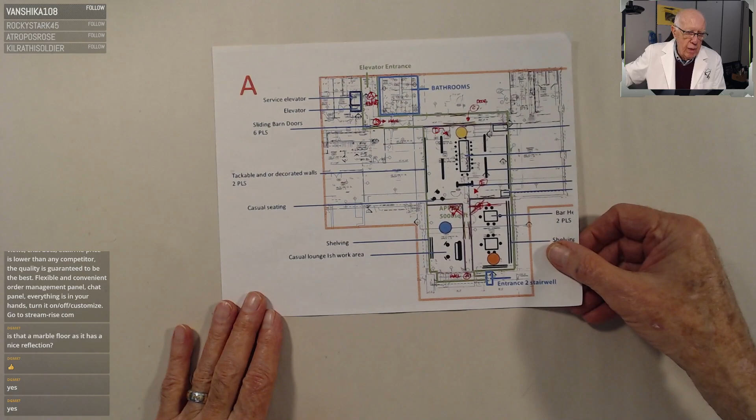If you get a chance to look at the site, please let me know what you think. It's just been a real joy to watch it all come together. We'll be adding some more things to it. For example, we're going to start putting a gallery involved, like a montage of gallery work that I do. So it's still going to be active, but it's so much better all the way through. And I cannot thank enough these guys, especially Michael, who put together overnight amazing work.